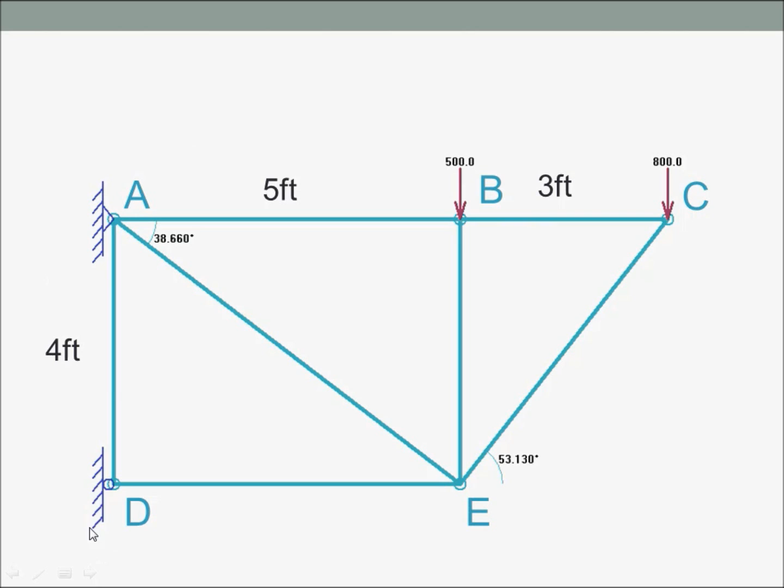So we're going to be solving for our static determinacy, solving for our moments, balancing our X forces, balancing our Y forces. We'll then draw our free body diagrams and begin to solve some of them.

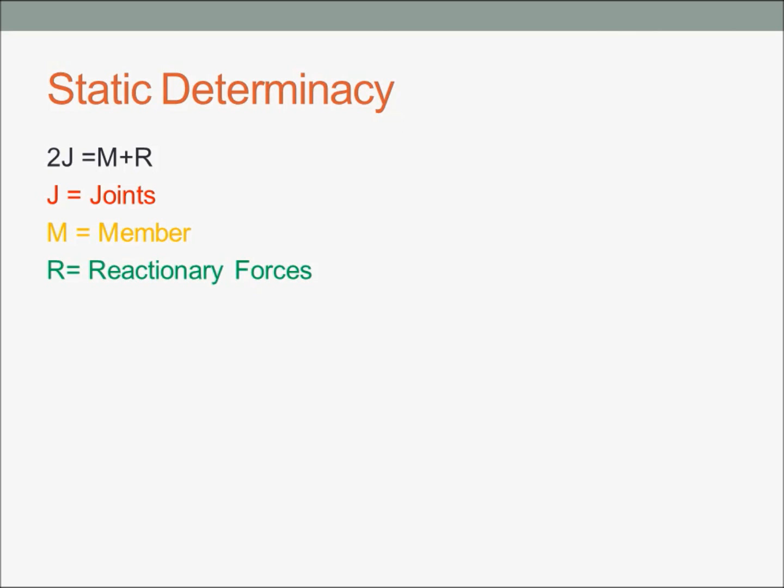To determine static determinacy, we use the equation 2J equals M plus R, J being the number of joints, M being the members, and R being the reactionary forces. If I look at my truss, I have 1, 2, 3, 4, 5, 6, 7 members, because this actually gets split into two different members there. I can't count that as a single one because that joint is actually making the break.

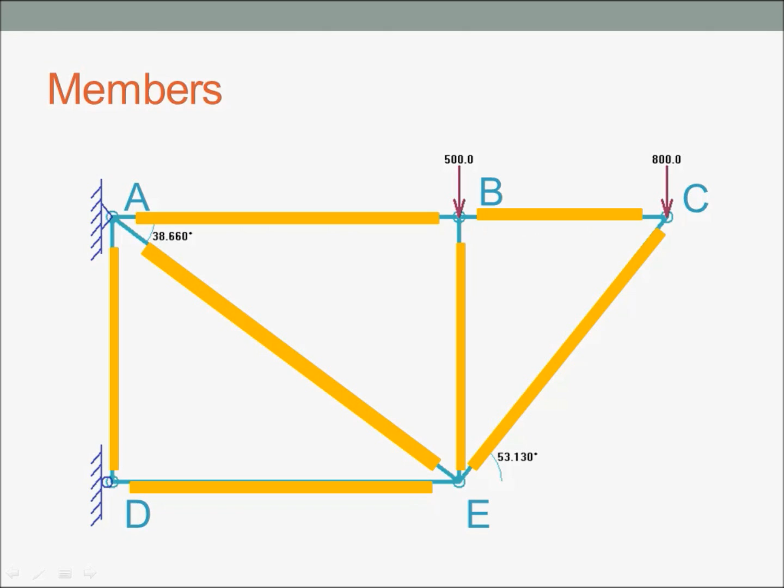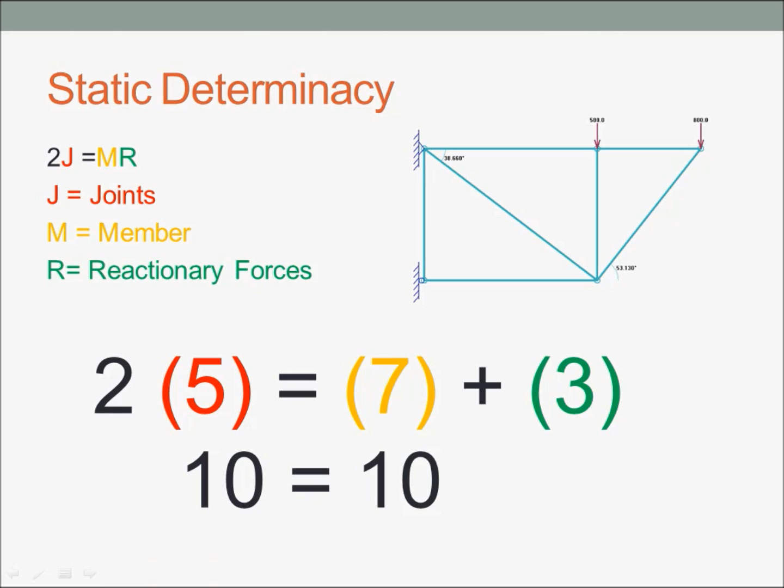I'm going to count my joints now. I've got 1, 2, 3, 4, 5 of those. Then my reactionary forces: whenever we have a pin support, it's not moving, and since this is a two-dimensional drawing, it's locking it in the X and Y direction. This roller support is like a wall pushing back on my truss, so that's just in the X direction. So I have 3 reactionary forces. That gives me 2 times 5 is 10, equaling 7 plus 3. It's really nice that 10 equals 10, because that allows me to know I can do math on this problem and continue on. If this didn't work out, I would need to restart my equation or fix my truss.

This is the pin that is not moving, so everything's going to rotate around that. My 500 and my 800 are both clockwise motions, whereas this reactionary force is counterclockwise. So my two clockwise forces are negative, and this one is positive.

The way we calculate our moments is: the sum of the moments equals the moment at B plus the moment at C plus reactionary force D's moment equals 0. A moment is calculated as a force times its distance. So I have my 5 feet times negative 500, and then my 8 feet times negative 800, plus my reactionary force times my 4 feet.

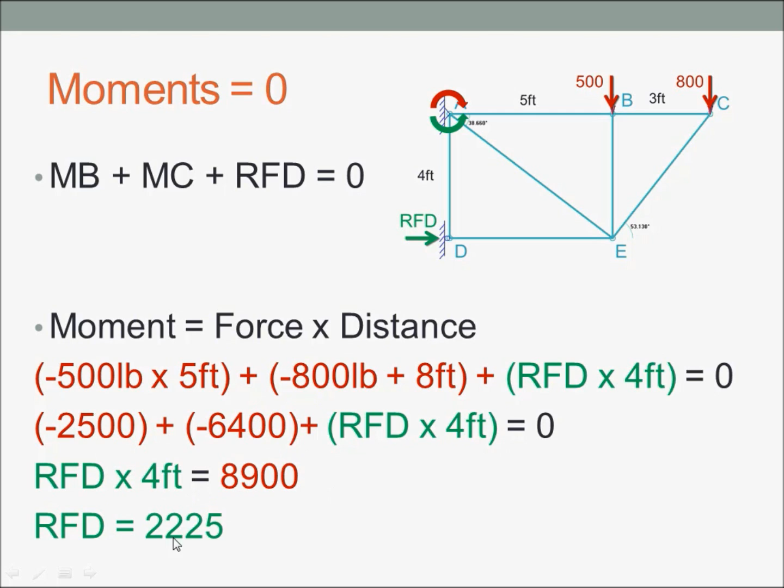If I simplify that down, I get negative 2,500, plus negative 6,400, plus reactionary force D times 4. I'm going to subtract these two values from that side, giving me this, and then divide by 4, giving me 2,225 for my reactionary force. I'm going to go ahead and plug that in.

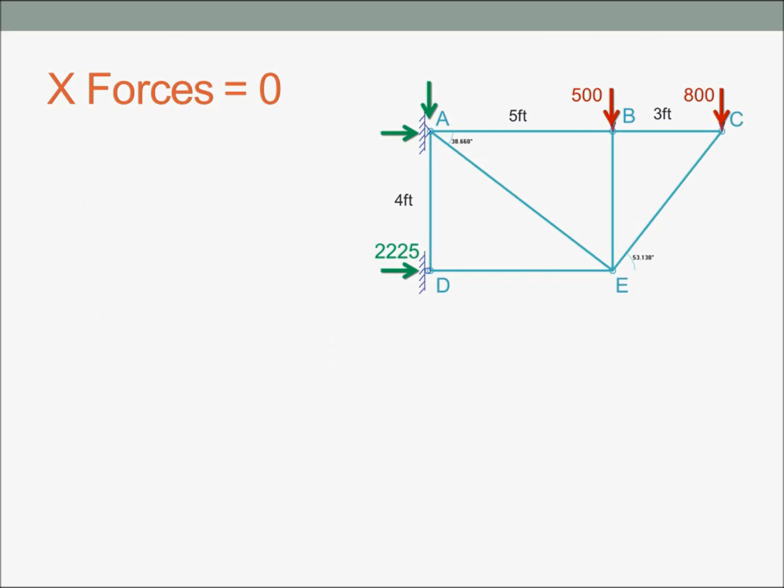Next I've got to balance my X forces. I'm going to circle my X forces — I've got 2 of those. I know if this one's going this way, I can't have the whole thing moving, so this one has to go in the opposite direction. So I've got 2,225 going in that direction.

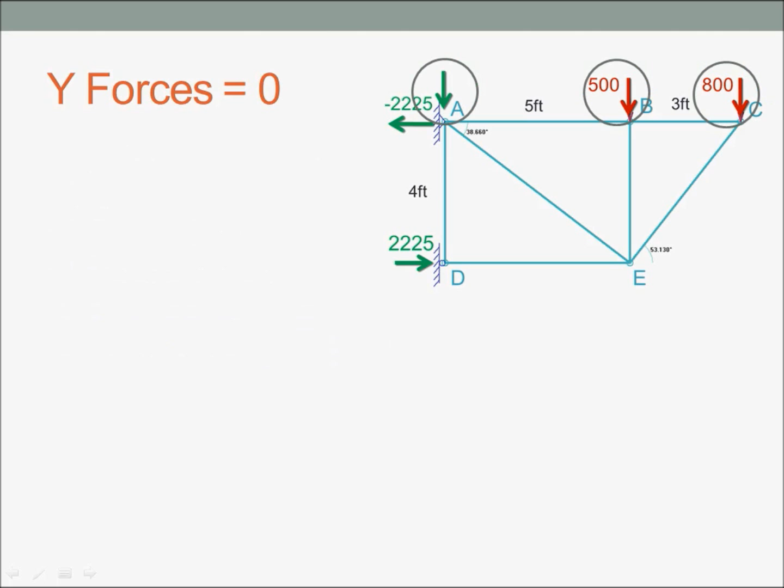Next step is to balance my Y forces. I again have 3 of those. If these 2 are going downward, I know I'll have an upward force that counteracts that. So that is my 1,300. I can plug that in.

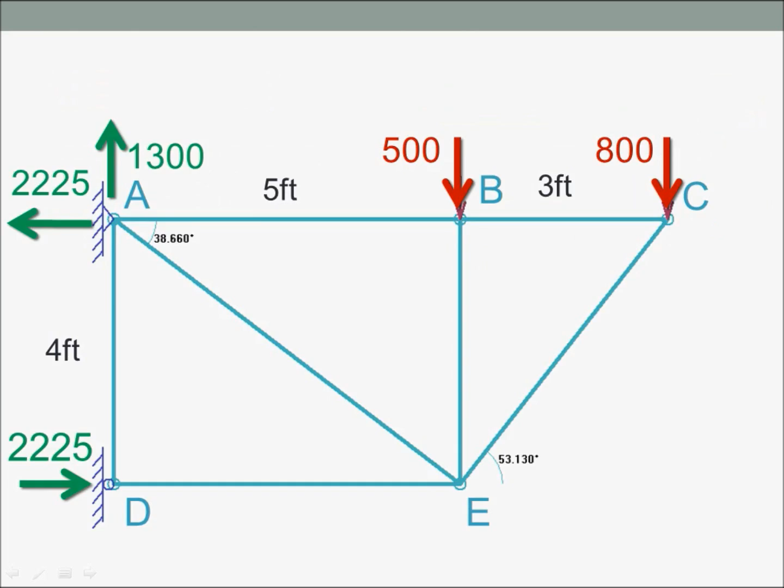Now this is where it starts to get complicated, because I'm going to start drawing my free body diagrams and working with it. I'm just going to put in an arrow to represent where all the beams are at, and then erase my truss from behind it. That allows me to look at these as free body diagrams individually, so I really have 5 problems here.

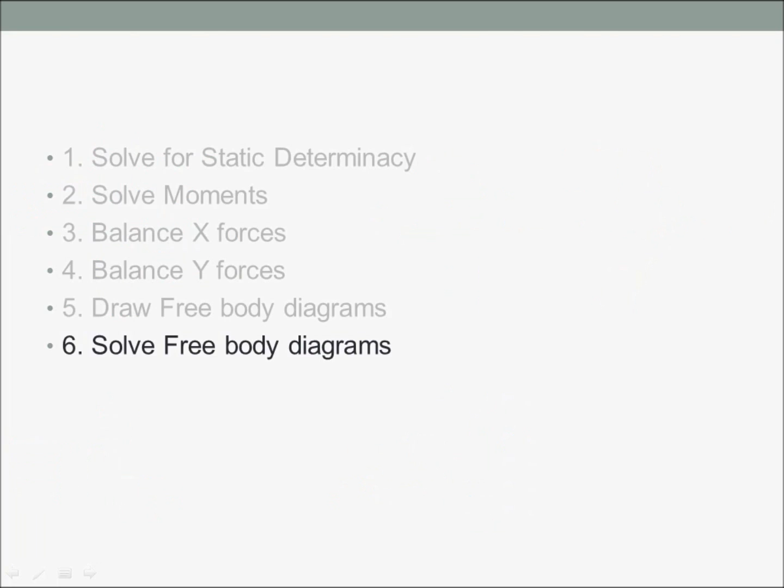I'm going to look at the easiest one to solve — the one with the least amount of math involved. So I'm looking at joint C, because I've got a force going downward and only one other vertical force, so I can solve for that very easily. What I have now is my 800 pounds of force going down, and the 2 blue arrows just represent that there is a member there.

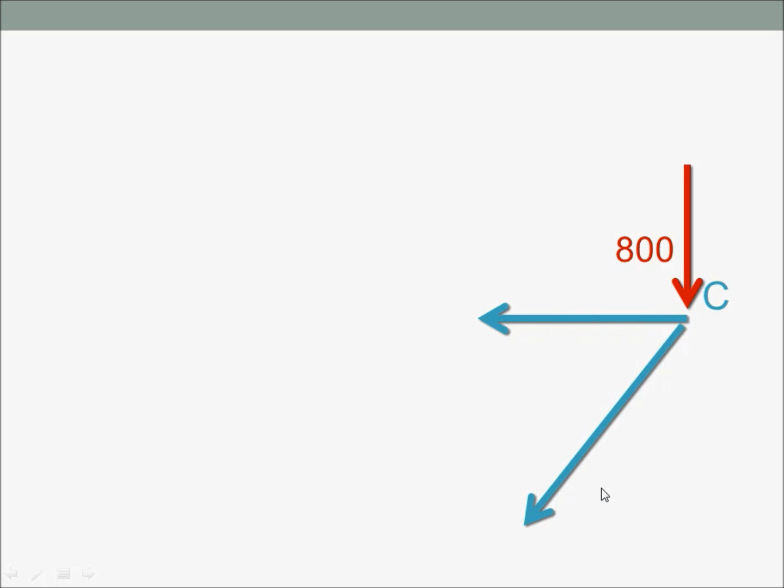So I've got to think about what force is going into it. I know that this is going to be pushing back at it, because that's going to give me a resultant force.

So for this diagonal force, I know I'm going to be pushing up a little bit, and that little bit has to be 800 to counter-react it. If not, this joint's going to be moving, and that's going to be a problem because we're going to have a truss moving. So what I can do is find my angle right here, and I can also write down 800, and that gives me a triangle.

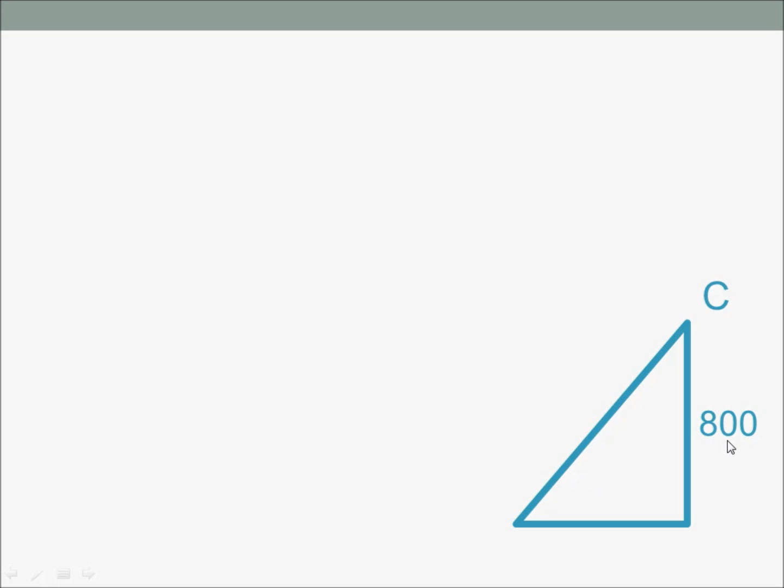So I know that this beam's coming in at a 53.13 degree angle, and this force is going to be 800, so that allows me to solve for that. I'm going to use sine because this is my opposite. So sine 53.13 equals 800 divided by my hypotenuse. If I do that, I get 800 divided by sine 53.13, and that gives me 1,000 for my hypotenuse.

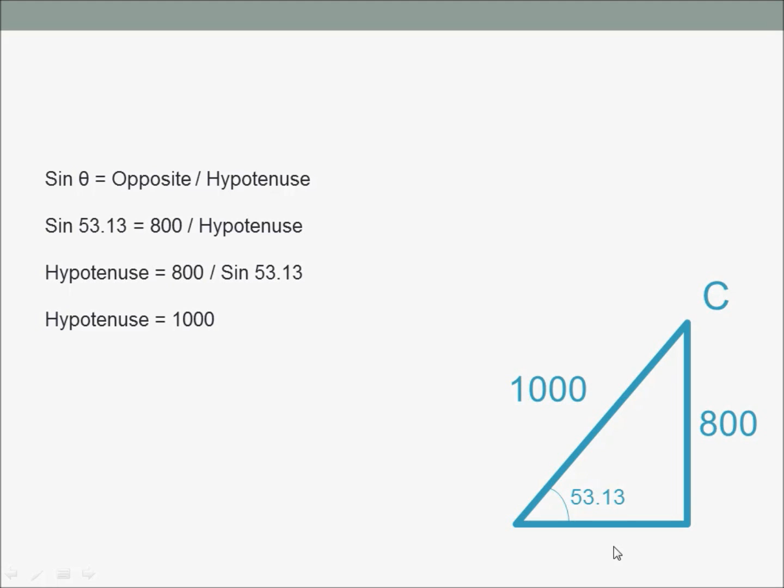While I'm here, I'm going to solve for my bottom right there, because that's another valued thing, the amount of force I'm pushing in sideways. I'll do that by calculating cosine. So my adjacent, this side, divided by my hypotenuse equals that. Cosine 53.13 equals my adjacent divided by 1,000. So I can do 1,000 times cosine 53.13 equals 600.

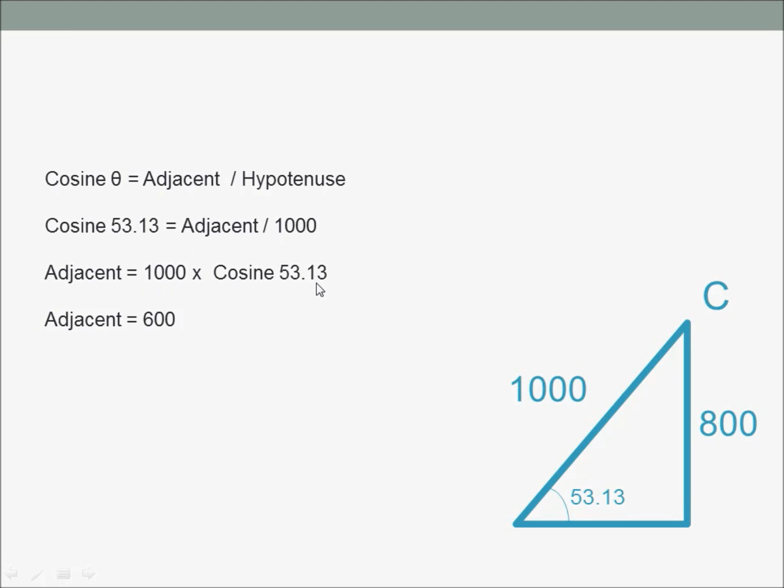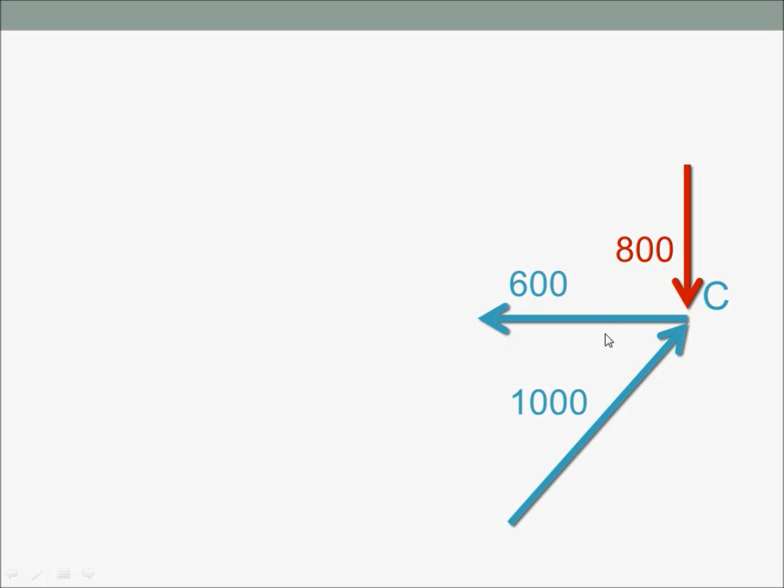So what that gives me is this force coming in: I've got 800 there, I've got 600 here, and I know this is 1,000. Now I'm going to have to counteract that. So I know that this beam right here is going to have a force of 600, because it's going to have to be pulling back from the force that this is applying.

So if I look at my truss, what I know is that this member is pushing towards that point. If it's pushing towards the point, that means it is under compression. If it is pulling away from that point, that means it is going to be under tension. So that is a good thing to know.

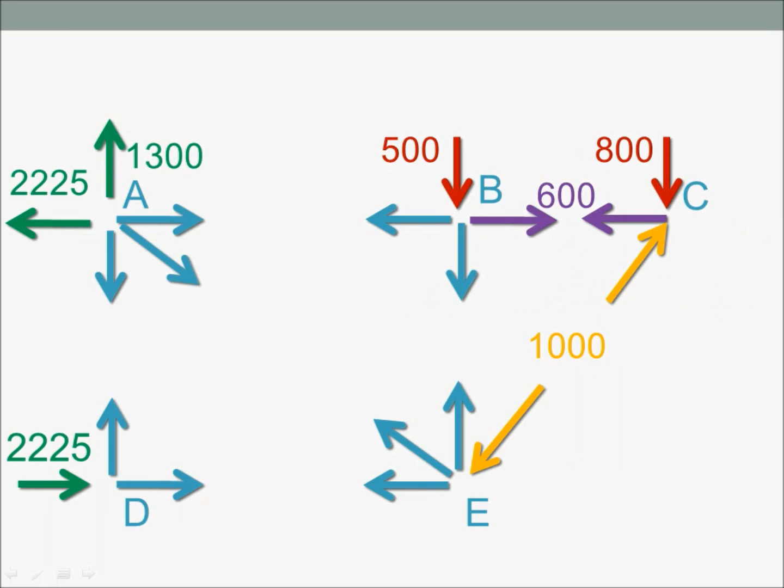Moving on, I'm going to move over to B because that's my next easiest. This was actually kind of simple. I know that 500 pounds is coming down, so I know there must be 500 pounds pointing up. It's pointing towards it, so I know it's compression. I've got 600 pounds going this way, so I know I've got 600 pounds going that way. It's pointing away, so again, that means tension.

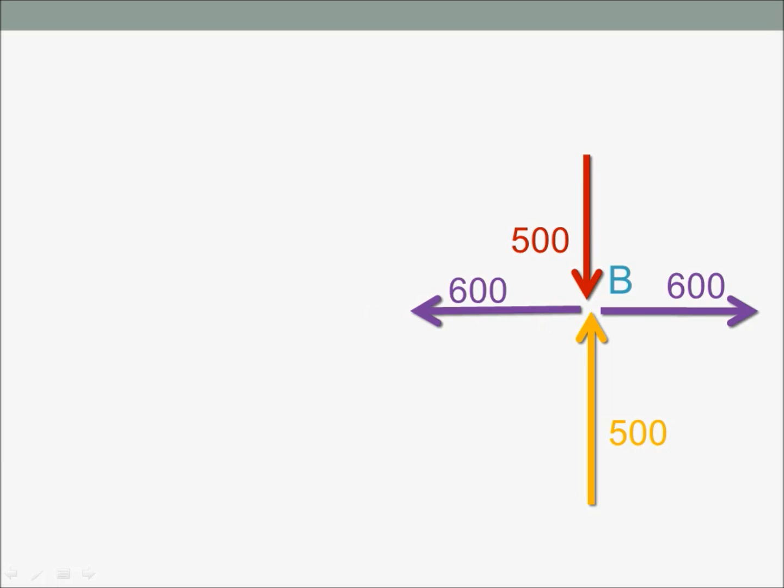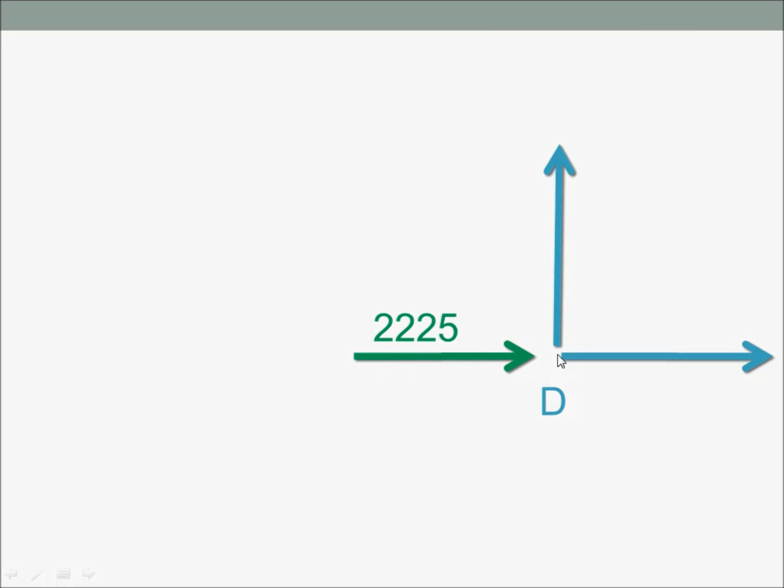Let's see here. We're probably going to look and solve for this one next, that's the next easiest in my mind. So what we have is 2,225 pounds of force going towards my joint. That means I'm going to have to come back with 2,225, letting me know that it's compression because it's pushing towards it. And there's really nothing counteracting that, so I know that's a 0, because to solve it, it's going to have to work that way.

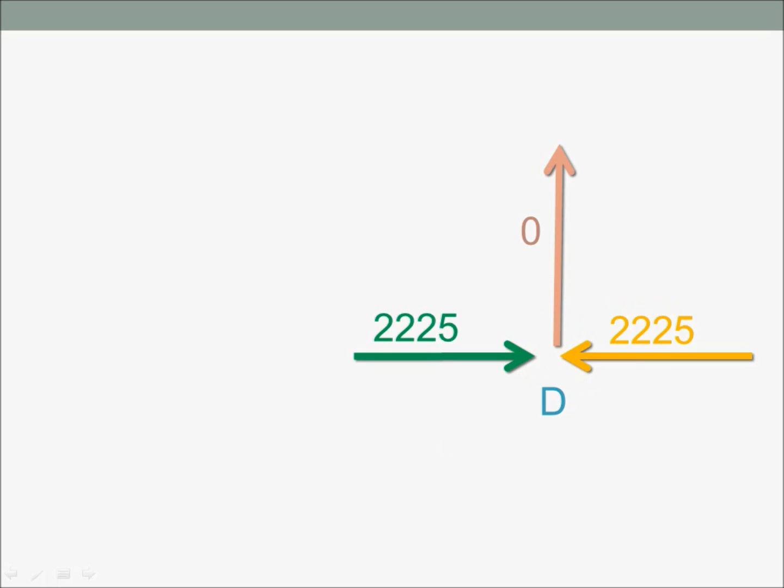So we have that, and we found most of our forces in our diagram right now. The only thing that's left is this little booger of a problem right here. So let's go after this.

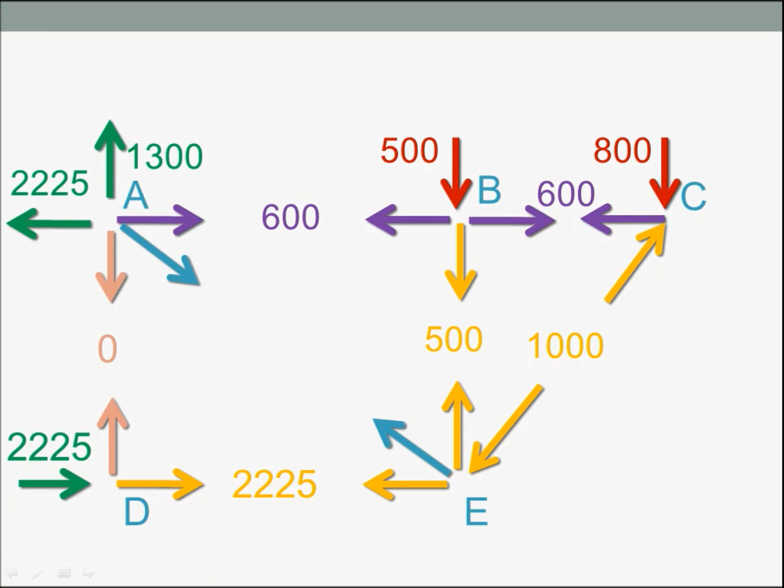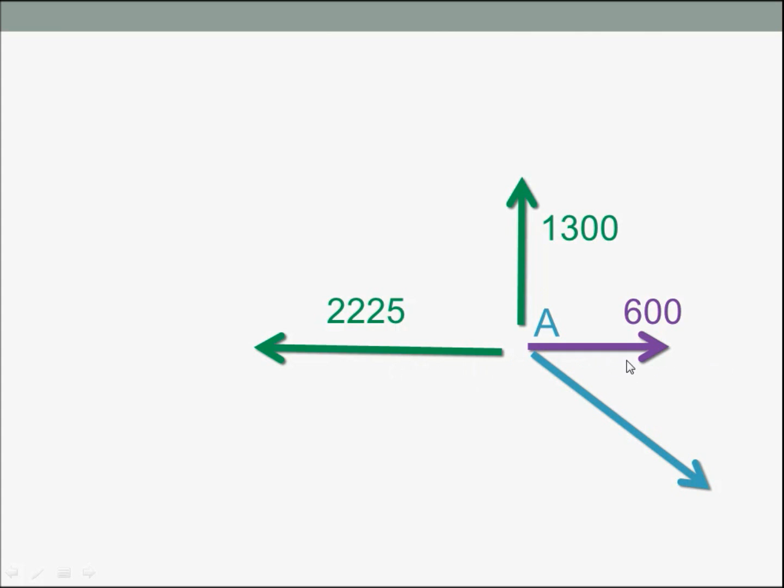What's going on is we're looking at joint A. We have 1,300 pounds of force going upward, which is reactionary force. We've got our 2,225 going to the left, which is reactionary force. We've already figured out that this one is under tension because the arrow is going away from it, 600 pounds of force. And we know that this is 0. Well, we don't really care about the 0 because it's not doing anything. And if I combine these two, I should end up with about 1,625.

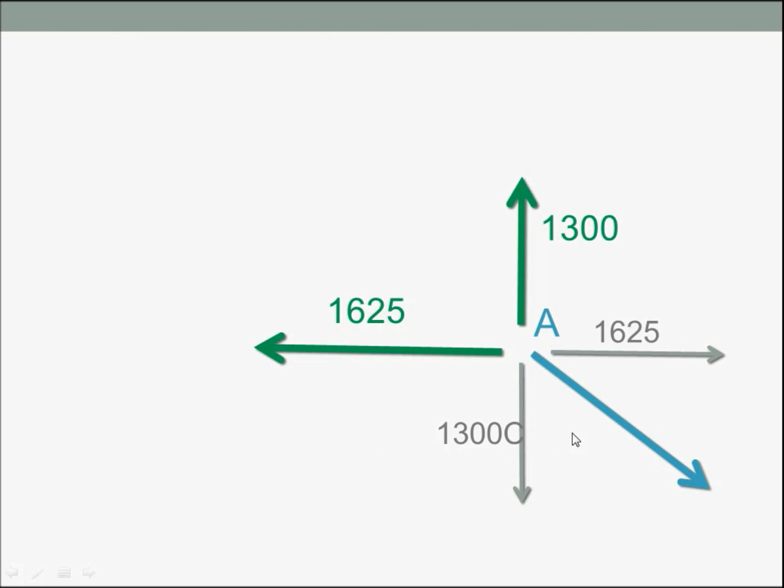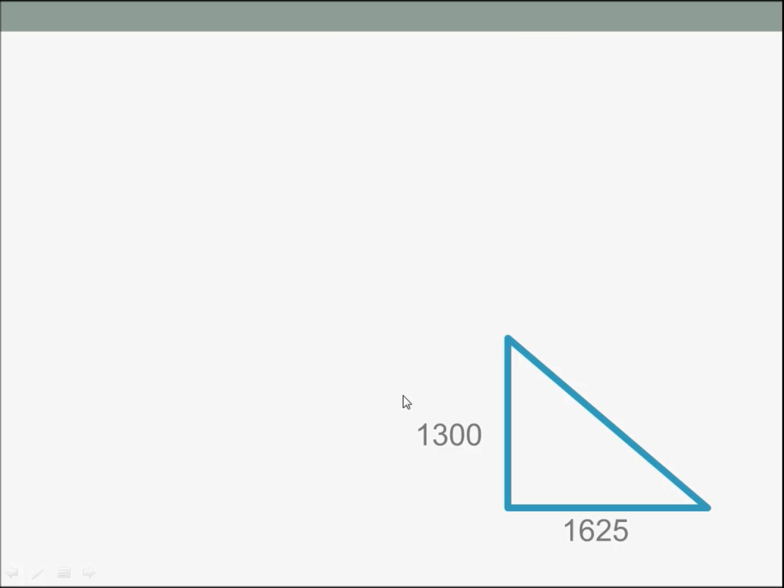That allows me to look at this vector and figure out that it's got to have two resultant forces: one being 1,625 and the other being 1,300. With that, I can now look at it as if it's a triangle, because I've got a vector that has 1,625 in this direction and 1,300 in that direction, so I can just use the Pythagorean theorem to solve for it. So a squared plus b squared equals c squared. I go through, solve all this, and get my value being 2,081.

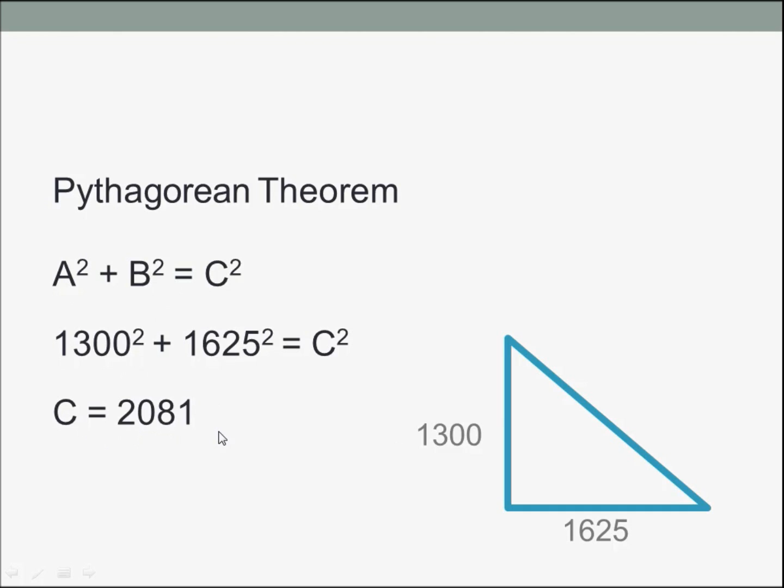So if we check at it, it looks like everything is correct. This actually came out of the MD Solids program, so I know this is accurate, and that's how we solve it.